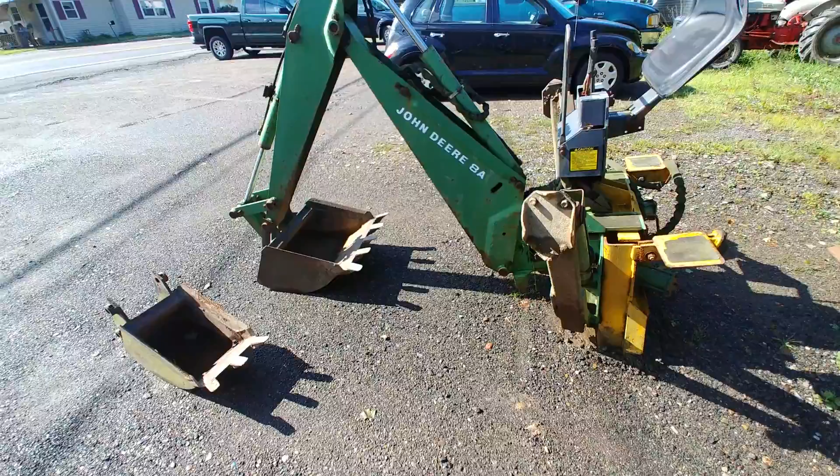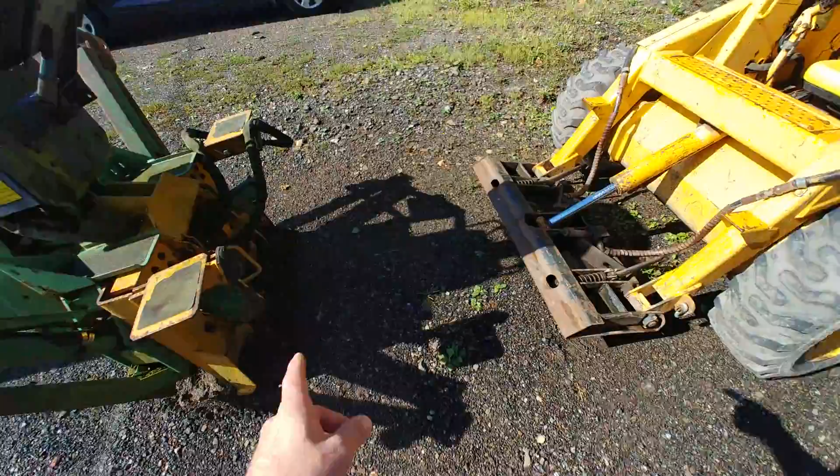Okay, check out this sweet little backhoe that I purchased for my skid steer. This is going to be very useful in my current project. I ran a couple hours out of town, one state away, to scoop this guy up. I'm excited because it's John Deere. My machine's John Deere. It had what looked like the same kind of mechanical attachment.

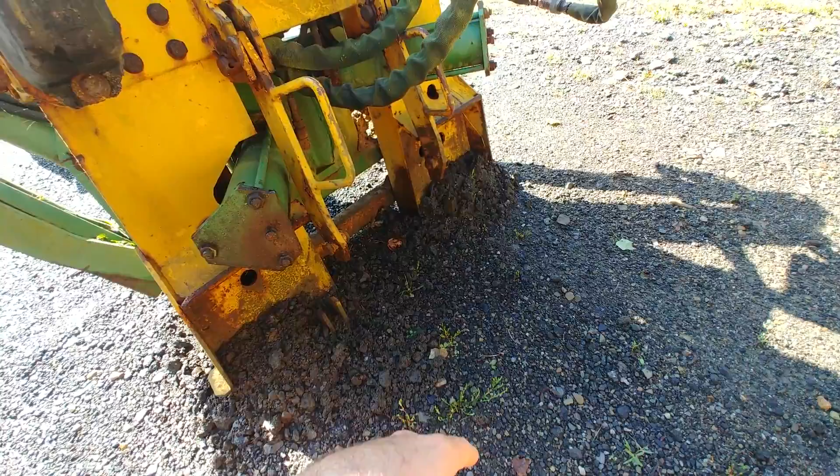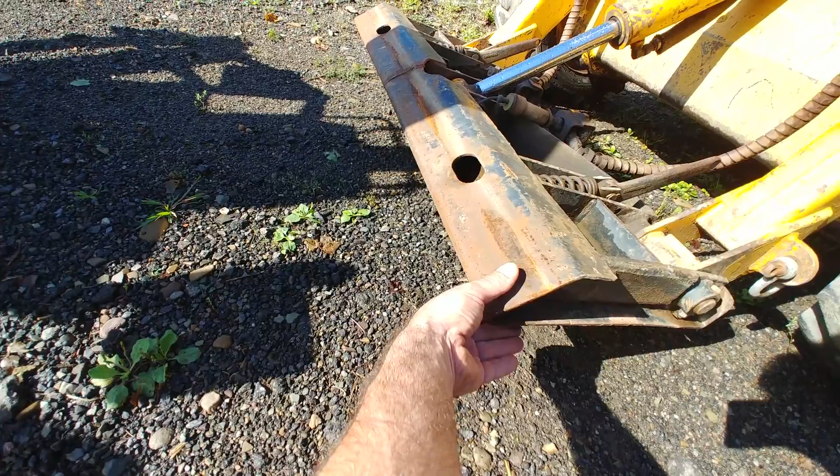This was before they standardized skid steer attachment, so I went all the way down there, and it is the same style. In fact, the hook, it's kind of buried in the dirt here. It's a French cleat, so this is a 45-degree angle underneath there, and that hangs on the plate for the machine, which bears the weight, and that's 45-degree negative, and this is a 45-degree positive, so it hangs on there, fits tightly, and the surface runs down that surface. This should be tipped up normal.

You can see how extended that is. But that bears the weight and provides a lot of surface area, and then you throw these levers, and a little bar sits into this hook, and then a cam pushes him down, so it pulls everything together tightly, and that's how you quick attach and unattach.

I got several attachments with this machine. I got a snow plow there, I got a set of forks, and a bucket. The bucket's the only thing that's OEM or manufacturer fabricated. They made it real pretty and relatively complex. You notice the sides flare out a little bit to help lead you in. This is a 45-degree negative underneath here, and then here's those hooks.

This is a better look. So it's the same style. The hook is the same, but mine's a bigger format. They're wider from one another. They're higher. It's a larger dimension to this. It won't work. I can't attach that to that, and I need to get to work.

So I kind of used this for reference, and I have a set of forks too. The plow and the forks have just got this farmer fabrication, I would call it, like a weird little pin that you throw in. They're not real secure. They're from something else. It's not a 45-degree angle cleat. It's just this U shape.

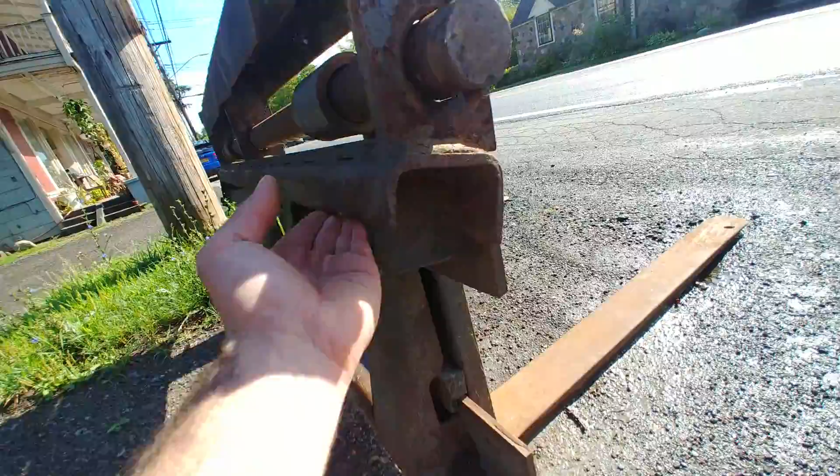So it hangs on my machine just fine, but I think what I want to do is make an adapter plate that'll go right onto the backhoe, and if it's cheap enough, I'll make one or two more. I'll make one for the forks, and I'll make one for the plow. At least one for the forks if it's cheap enough. But then I'll really have an arsenal of machinery here.

And then I'm gonna maybe burn hooks. I'm gonna have all the pieces cut on a CNC table, so I'll show you what I'm doing with CAD in a second. But I'm gonna have to cut these off and take the end cap off, and then my plate will basically go in underneath this and be attached to this assembly permanently. So the ends will come off of this, but the 45 I make will go right into this 45 and

make a new larger negative, and the hooks will be cut off so it'll fit in there, and then it'll hang on my machine. I can put those hooks back on, but I may just have new ones cut as well, so I have them if I want them, and if there's a problem getting the old ones cut off and reusing them, then there's no problem because I've made new ones.

So this morning I'm still in my flippy floppies, but I gotta get to the local gravel pit. A family friend runs that.

Come on, fucking horse shit.

Trying to keep the cat inside. Where are you, cat?

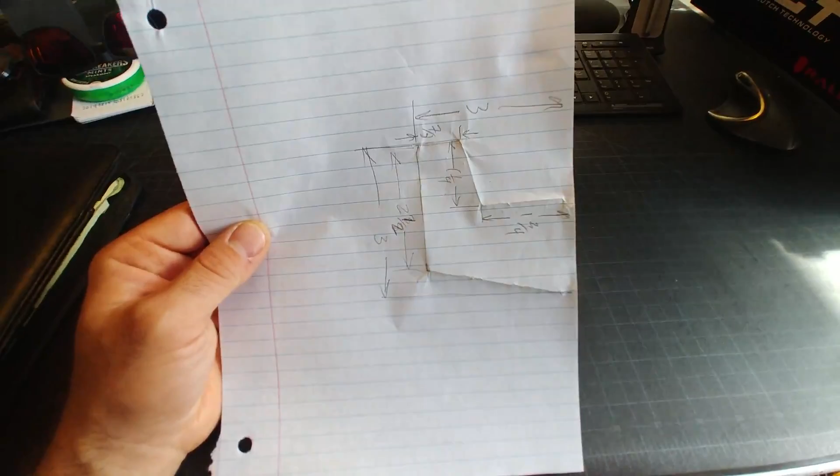Anyway, I went out to get the hook geometry. The simplest thing to do sometimes is take a photograph if you can keep the lens distortion down, and then work with a photograph as an underlay in CAD. Or, I knew this was farm equipment. It would be fairly rounded numbers, and it's not very precise. You know, we're not working to ten-thousandths of an inch.

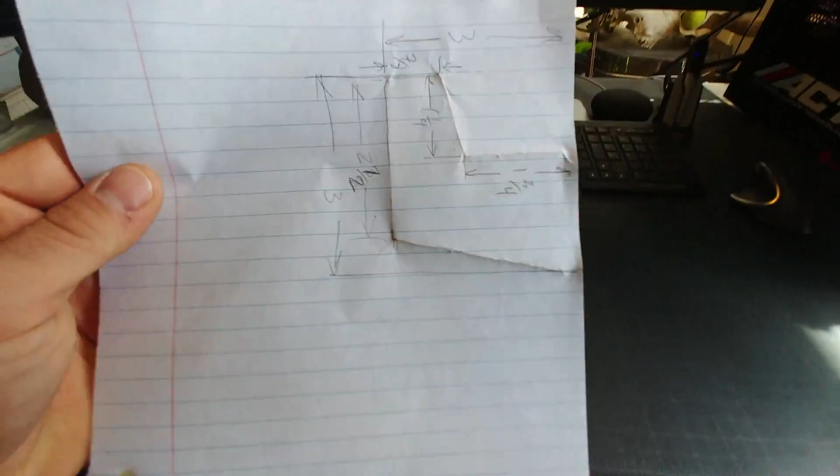I justified the edge of this paper to the back surface of the bucket, because there's a weld here I wanted to make sure to accommodate, and then I just pressed the paper around and got a template, measured it with the tape, and it was fairly straightforward, round numbers. And people may approach this incorrectly. There's a whole method to my madness here. This is the part that you want.

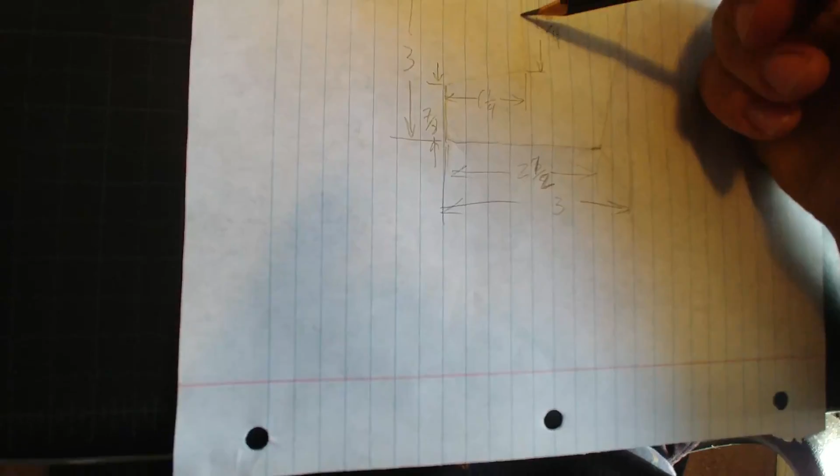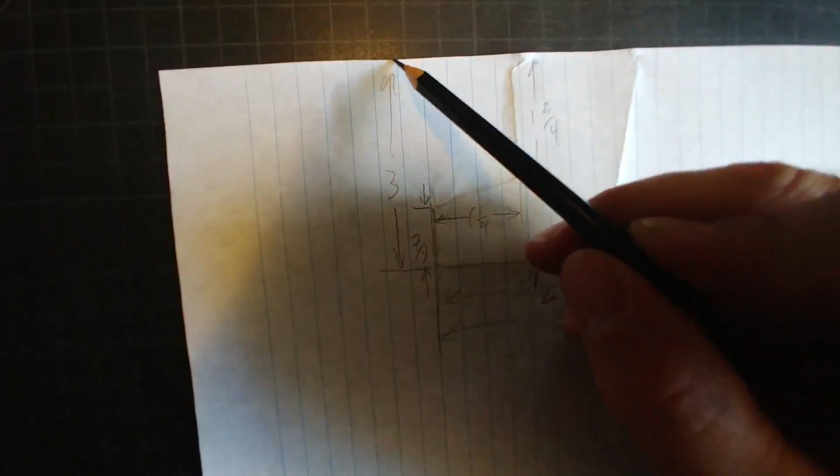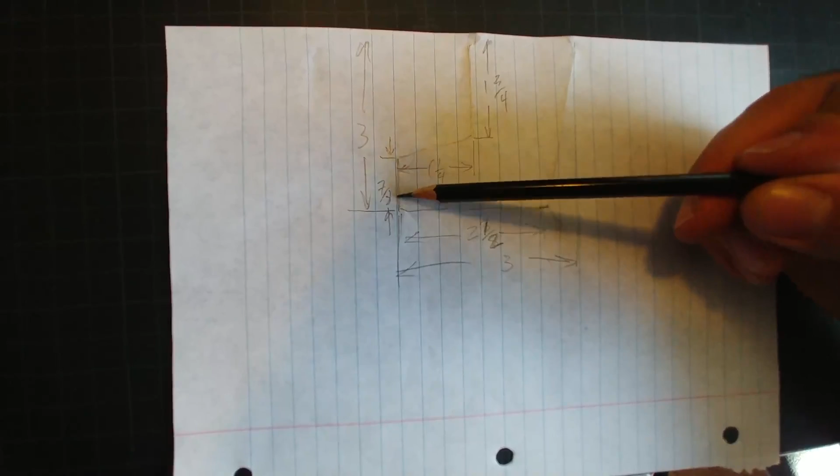People immediately, when they see angles, want to find angles. What's the angle? How do you measure what this angle is here, and how do you measure what this angle is here? Forget it. This paper is normal to the back of the bucket, and obviously the back surface of this hook is parallel to the surface of the bucket. And obviously the top surface of the hook is perpendicular. This is a 90 degree right-hand corner.

So all I started by doing is measuring from the surface to this corner is 3 inches. I did this on lined paper, you could do it on graph paper, this is helpful, but I know this surface falls basically on this blue line, and this corner comes in maybe a little heavy, but it's real close to this line, so if I move that down I can get a measurement from there to there, and that's about 3 inches. Now we're in a box. We have a 3-inch box.

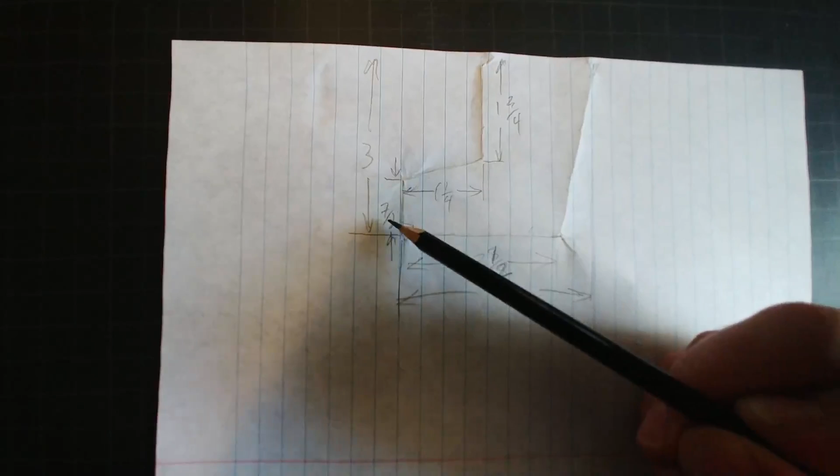Then I measured the length of this surface is 7/8 of an inch. So I put him there, and I measured the length of this surface, and its distance from this surface right here, so you can get his length correct and his position. And the last thing, you get these straight lines all in here first, 2, 3, and then this point back here. You have these two ends, then just connect them. I'll do that in CAD. This is the translation, so it has the line in there, and this has the line in there.

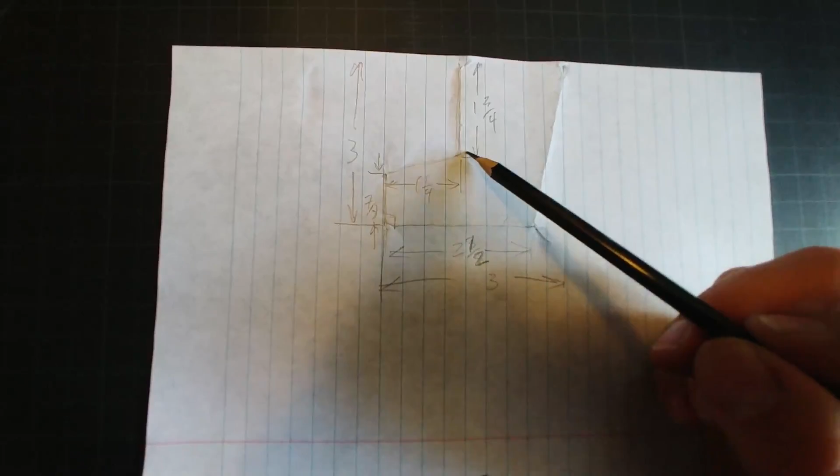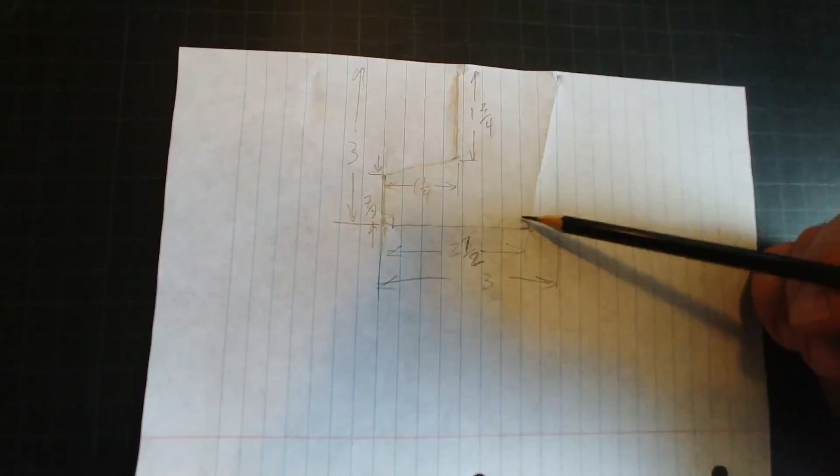But in CAD, I'll just make a 3-inch by 3-inch box, and then I'll put these two lengths in this corner, note this point here, and pull this line down to this length at this location from this line, and then I'll be left with just putting a line here, click, click, and it'll shoot into place, and click, click, it'll shoot into place there, and I'll have the hook in CAD. That's a nice way to do that.

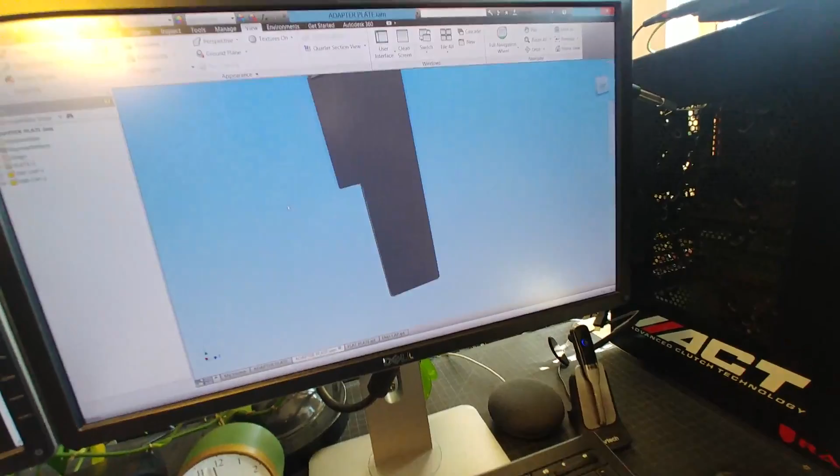The rest of this system here, let me put this into Autodesk Inventor. Before everybody comments, what software do you use? It's Autodesk Inventor. It's a mechanical 3D program, very much like SolidWorks. But this is the idea of what we want to make. It's just a plate that hangs on my skid steer plate.

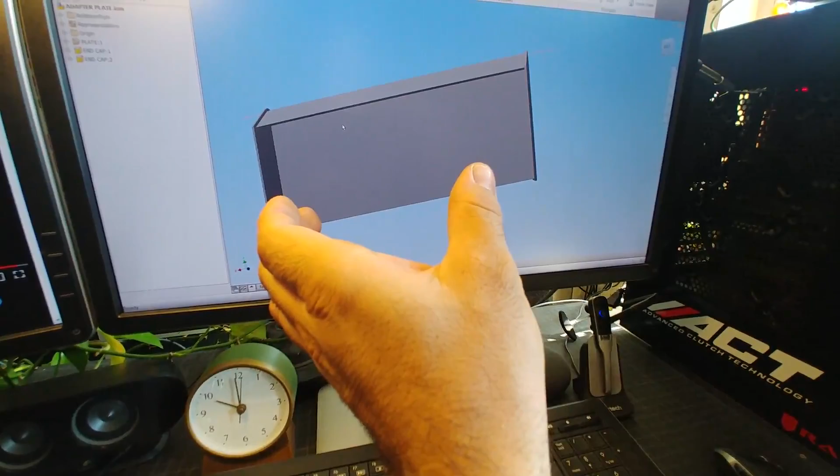You notice the ends are larger all the way around. I didn't make them fit inside. That turns into a pain in the ass to weld. The dimension inside here is a certain size. So if I made the end caps fit inside either direction, it makes that dimension smaller, so this overall plate would have had to have been longer. Okay, no problem. The idea being you make this perfect shape that fits in there,

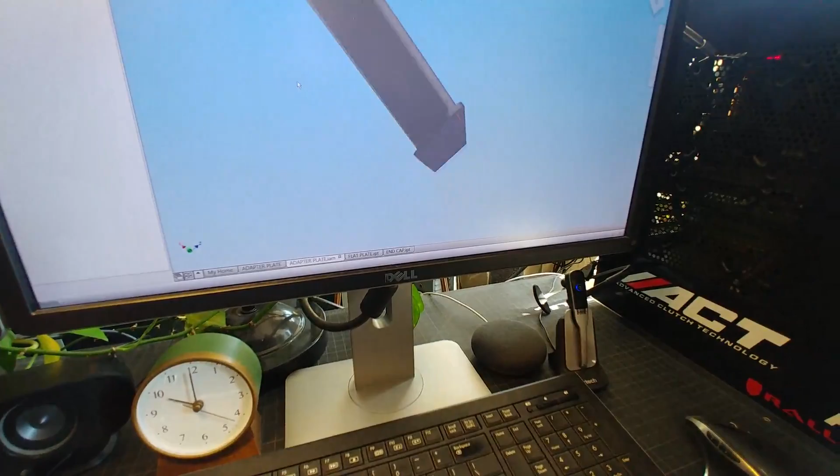where this plate passes and that butts inside, but then you have to weld it along the inside, which gets in the way. It rounds the inside corner out. Or you have to weld it around the outside, which is unhandy on an outside surface. You're just adding an ugly weld around the outside. And when you take this plate and bend it, they're going to put it in a device with a negative and a positive, like a dull paper cutter, and it's just going to push into that plate, and from flat it's going to go to 45 degrees.

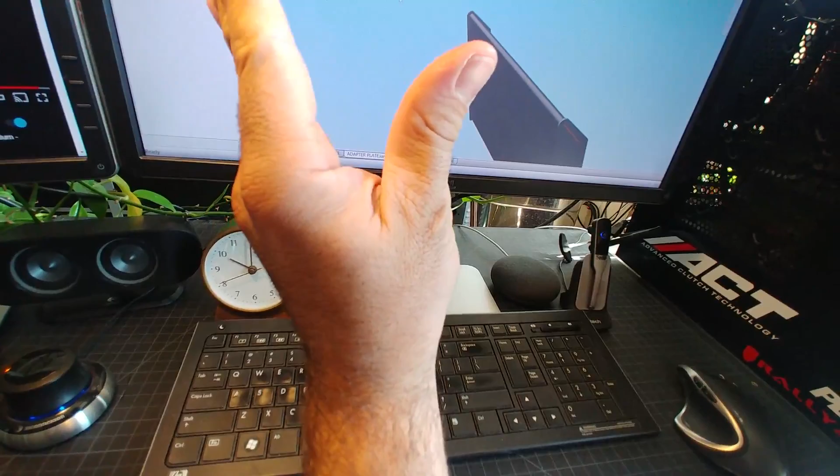But it's very hard to dial in the exact radius and the lengths of these legs. It's kind of rough. So trying to make a piece that'll sit perfectly in there and be ready to weld is a fool's errand. So we've designed this with that in mind to the best of our ability.

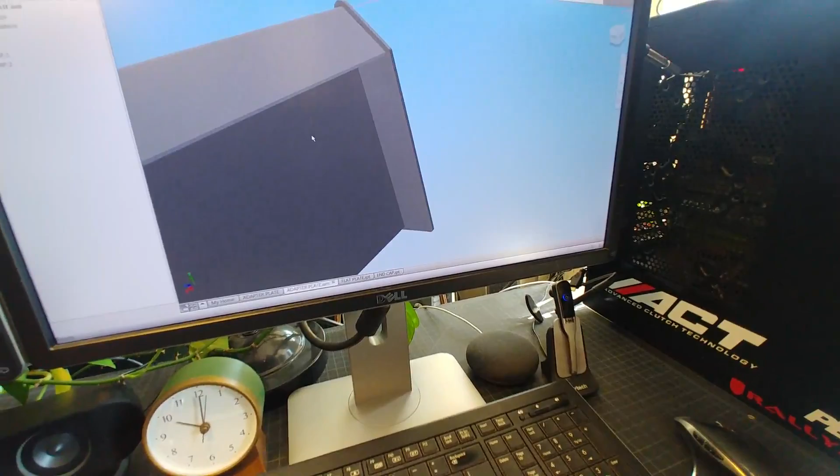We don't do this full time, but I have worked in drafting and mechanical design for several years on several different occasions. We left it longer all the way around, and then it can be seal welded or stitch welded in that inside corner, no problem, and that weld isn't in anybody's way, and it's bigger all the way around.

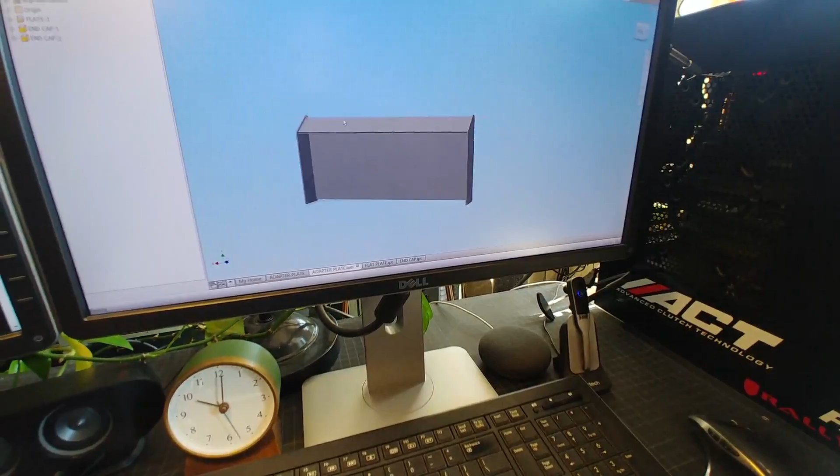So we have room to put it on there, so long as the plate is correct, then we can float that end on there until it's balanced all the way around and welded. It'll look very professional. It's not aerospace here. So that's our intention. Then I had to figure, I didn't use the sheet metal tool in this, which will flatten something that you intend to bend and tell you what the overall size is.

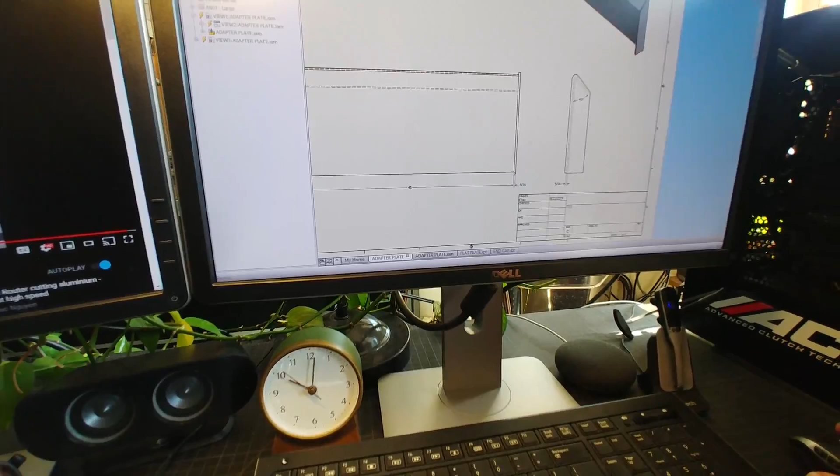I did a little bit of head scratching and worked. I basically measured both legs of that piece. I just went into the sketch environment. Here's the adapter plate. This is the drawing, excuse me. Where's the end cap? Here we go. You go into the end cap, and I can open up the sketch, and I just sort of measured this inside leg and that inside leg length and added them together.

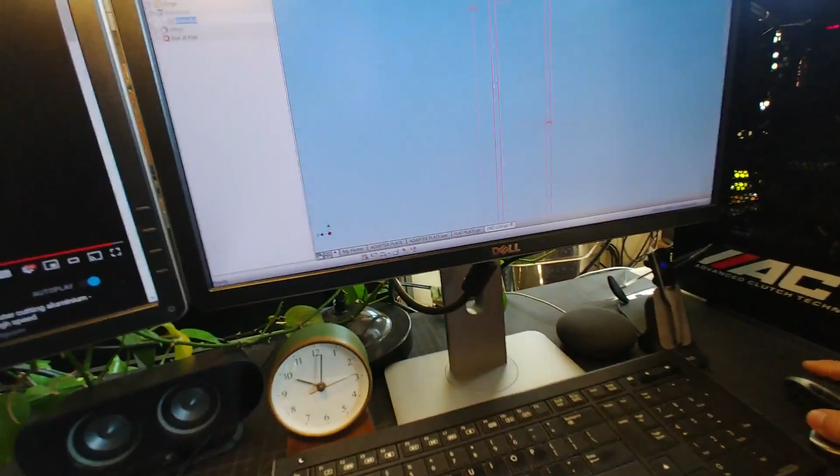It was about 18 and 4, which is about a 22-inch piece, and that means the bend is right at about 4 inches. So now I've got a flat plate that's that size, and we'll cut a rectangle out, and then I'll just say 4 inches down will be where we'll put the bend. It'll be marked with chalk. It's very rough,

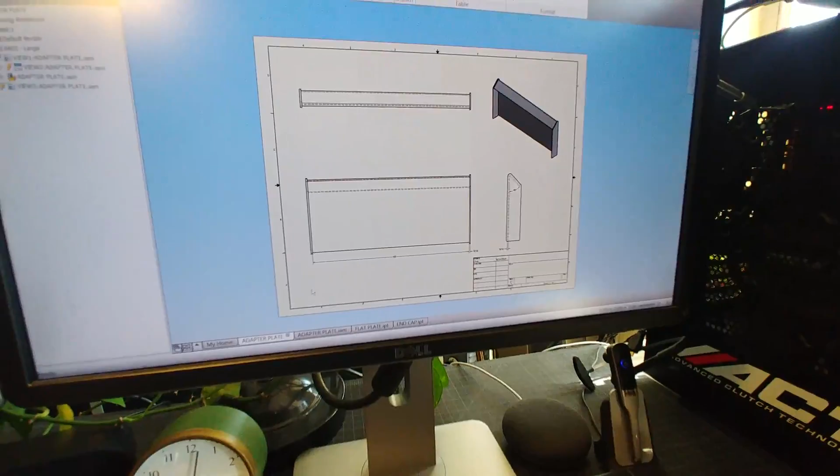but this will be enough, and I'll get the drawing together to go down to the shop, so that I'm not a complete fool going in there saying I kind of want it like this and I kind of want it like that. No fabrication shop wants to hear that. Even if it's a napkin sketch, even if it's something sketchy like this, draw it. So here's the 3 views.

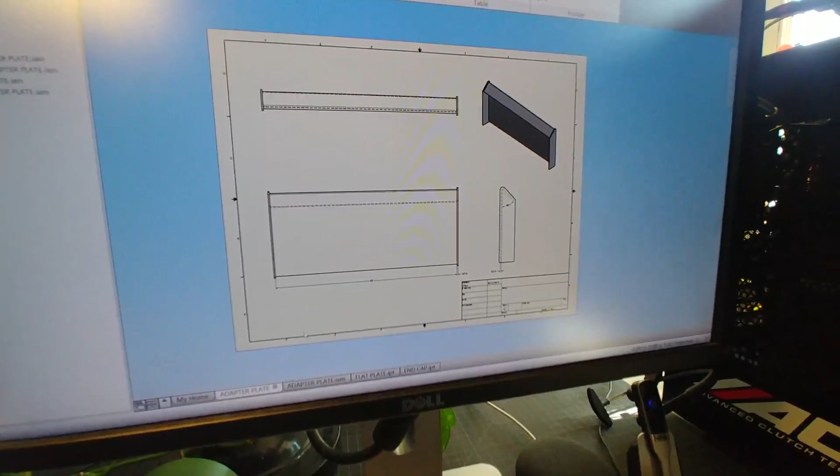Some people can't use CAD, but if you're trying to make something custom and you can't even make a drafting of various views of it and put dimensions on there, then you have no business farting around with it to begin with. Anyway, so we're preparing this stuff here, and we're going to work off of this to draw up hooks, and there'll be a spot on the plate where we could just burn them.

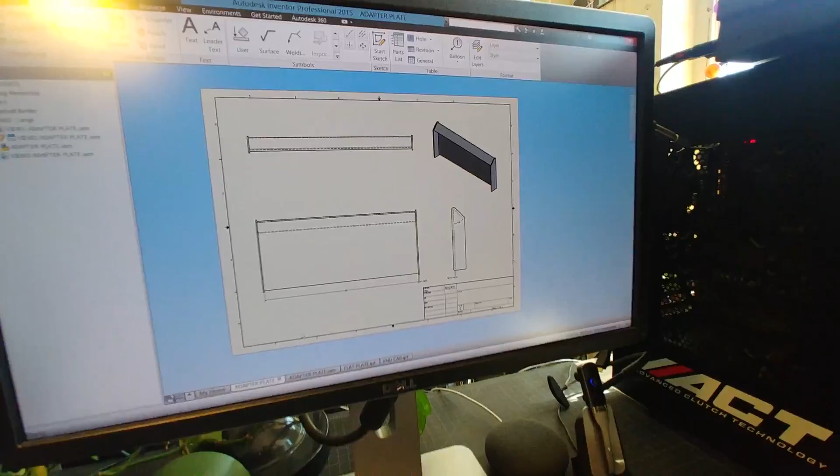I think it's 4 per unit, so we'll make 8. And then we have the 4 that we could cut off that plate. If we can reuse them, we can reuse them. If we can't, we can't. But there's probably no problem cutting them. It's just going to be getting right along the surface to cut them off.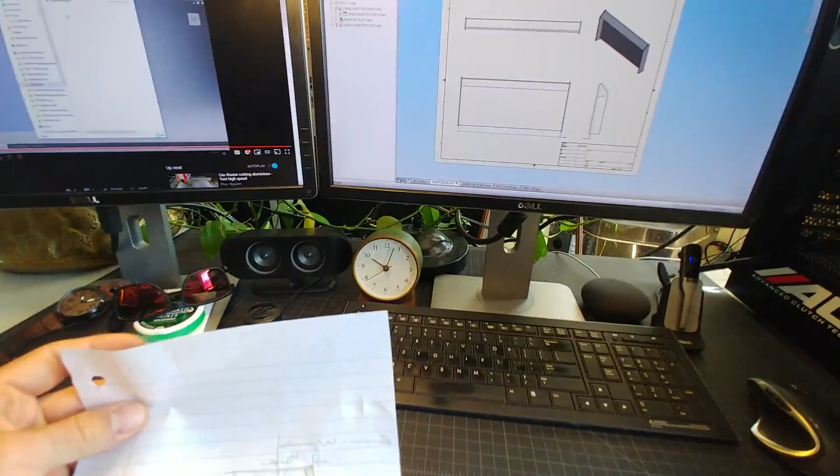You always have the rest of the grinder or the cutting wheel arbor sticking off, and it steps your cutter down. You can't quite cut it flush, and then it's a bit too short, and then this is a little bit too small, and nothing works quite right. So I think the easiest thing to do is to start with a complete one, and we'll probably end up using the new ones. But I just wanted to cover this here. It took an hour or 2 to put this material together.

Then we're going to take the CAD lines down on a thumb drive and CNC cut them on the plasma cutter. We'll show you that, and fold them on the brake. And we'll see how it turns out in the end.